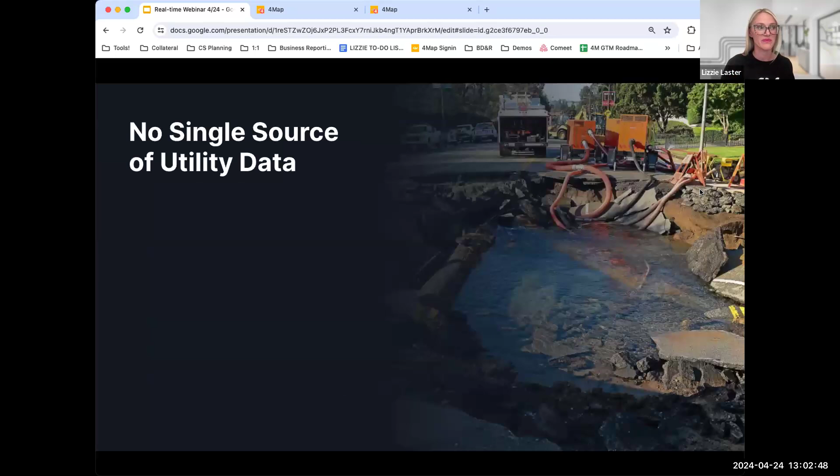When it comes to collecting utility data, the fact that you even joined us today tells me that some of these things I'm about to talk about might resonate with you.

Record research is time consuming. Data is fragmented and there is no single source of truth. Owners respond slowly at different times, if at all, and records can be inaccurate, outdated, incomplete, or non-existent. Poor data leads to poor planning, poor design, and budgeting issues. Due to lack of data availability, there is poor and inefficient planning and design, resulting in extra field investigations due to incomplete data and undefined plans. There's also a lack of certainty in contingency budgeting.

This uncertainty puts your project's execution at risk. Unexpected utility findings lead to project delays and cost overruns. Utility relocations are costly and lead to redesigns and more cost. These are safety hazards due to unknown utility lines and landscapes. I think if what I've said here makes sense to you, that's why you're here today.

So then who are we? 4M is set out to unlock the world below us, ensuring the continuity and development of all critical infrastructure and services that people rely on, through extracting and conflating data from the public domain and documents such as as-builts and blueprints, as well as leveraging satellite imagery for identifying on-surface objects and change detection to validate the data.

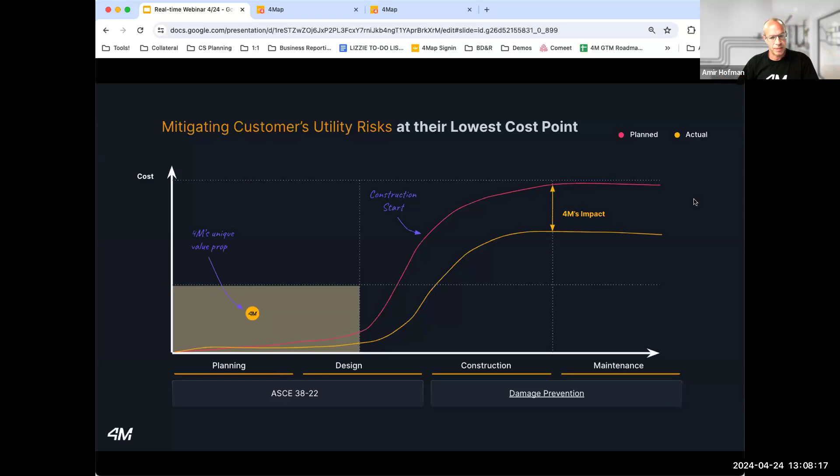So when we're focusing on the real-time data, first of all, what do we mean when we say real-time? We mean that it's preliminary, foundational data that is available to you instantly, in just a matter of a click. You create your project in our product, click a button, and immediately, in a matter of seconds, you get the utility information you need to proactively identify risk and conflict resolution before the field investigation begins.

Regardless of whether you are an organization that follows SUE practices fully, partially, or not at all, having this comprehensive utility information at the beginning of the project will give you a clear picture about the utility infrastructure within your project area and help you minimize the unknowns and plan your project correctly. So these are the benefits and the value that we provide with the real-time data.

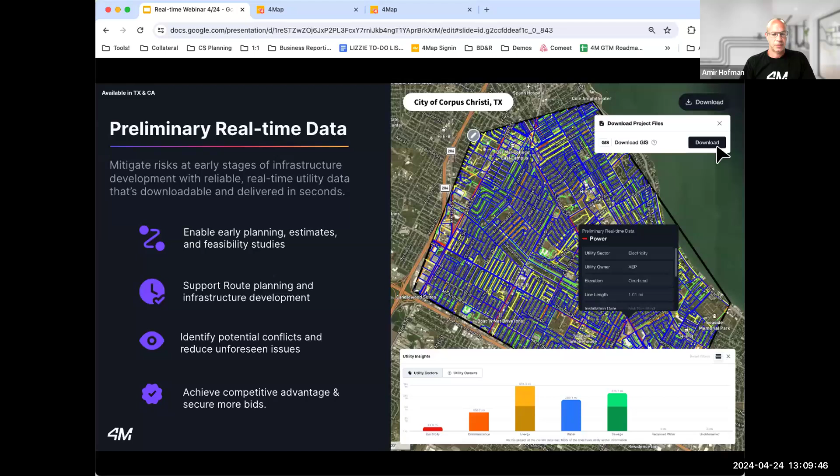This is an interesting part. Usually in the initial phases of the project, all of you are submitting tickets to the one call center, design tickets, to begin the process of identifying underground utilities within the project site. You're getting utility owner responses, identifying utility owners, etc.

You're usually doing it to get the data, even though we all know the data there isn't sufficient, but also from a liability perspective, to start communication and collaboration with the utility owner. The process of submitting a design ticket and getting information back from the utility owners usually takes days to weeks for responses, and sometimes responses may not be received at all from some utility owners.

Now imagine that you just click a button and get instant access to utility owner information, enabling your immediate planning and coordination with the utility owners while you're waiting for responses from the one call center. You're not replacing the process with the one call center; you're just getting the responses and utility owner information in a matter of seconds, so you can start your planning immediately without waiting for these responses. This data-driven approach accelerates project preparation and minimizes dependencies on traditional response times.

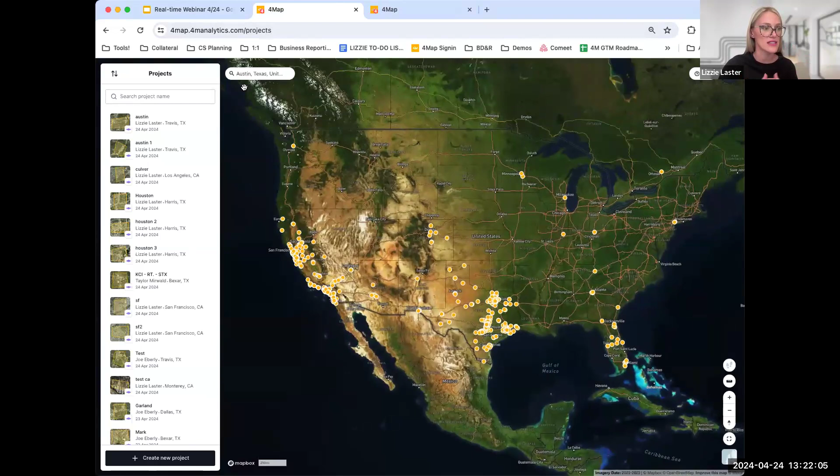What I'm going to do here is zoom in just a little bit, where I can then create my new project. I'm going to draw a polygon just in this area, grab a big swath of area, close out my polygon, and hit next. I'll just call this Austin, and then hit 'see utility map.' It's kind of straightforward as that.

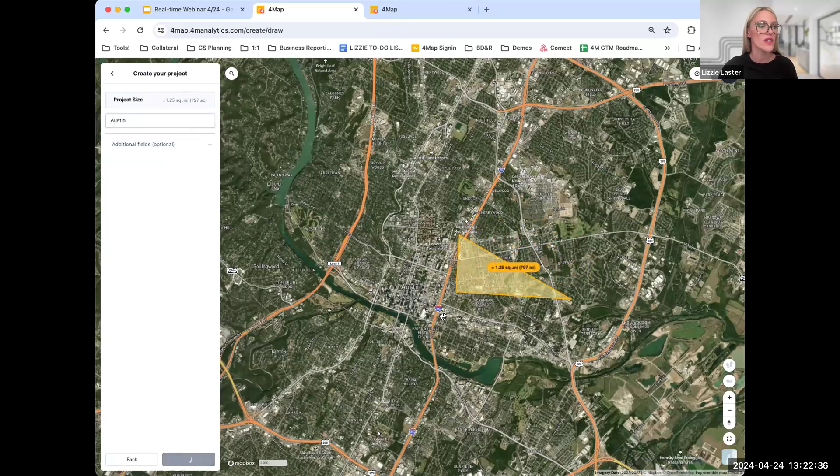The first layer you're going to see is what's called our utility density map, and this is the data behind the real-time layer. This is free to anyone who logs into the platform today and wants to take a peek at some of their projects, where we give you high-level analytics such as the total utility owners and utility line length.

But for the sake of this, I'd like to also take you to the real-time preliminary data layer. So this is going to start loading in, and you'll see in a matter of seconds the real-time utility layer. What we're doing here is providing you real-time access based off of the public realm and GIS databases and servers, giving you visibility in seconds into what you guys would go about collecting for your records.

When we think about this layer, think about marketing, business development and pursuits, initial record research, feasibility and concept planning studies. That's really where we envision this layer chiming into your workflow today, allowing you to go after more projects and perhaps even win more bids.

I want to navigate around the platform a little bit and show you what you can see inside of this layer. So as I mentioned, in a matter of seconds we're giving you access into the amount of utility owners at this level, as well as the utility line length. I'm going to take one second to jump into the utility owners and show you how we slice and dice the data.

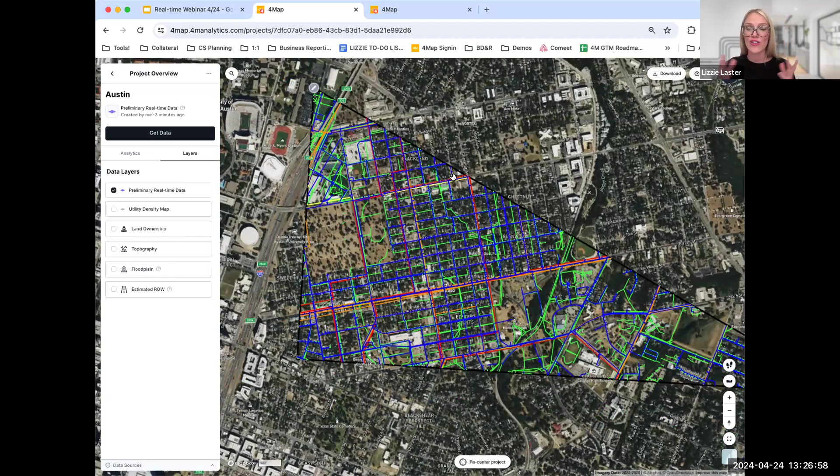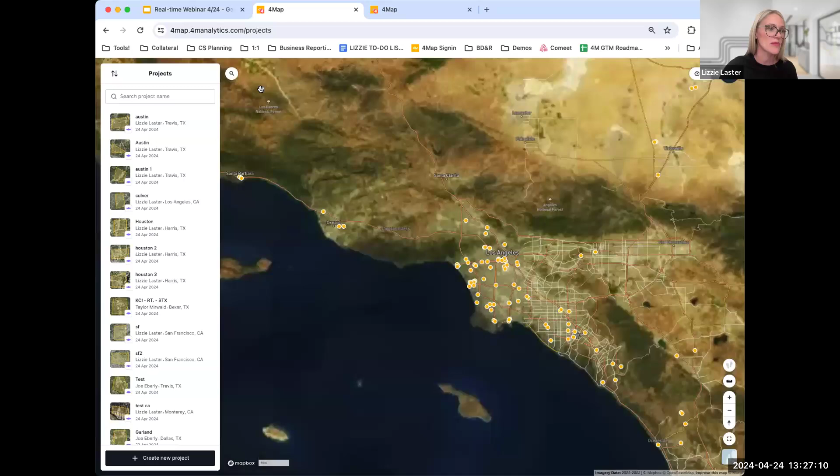The next thing I want to do is jump over and show you a similar project in the California area, as we are launching California, or just launched California. I want to give you a sneak peek at what that could look like for you. So I'm going to head on over to Culver City, and from here, I'm going to zoom in to sunny California.

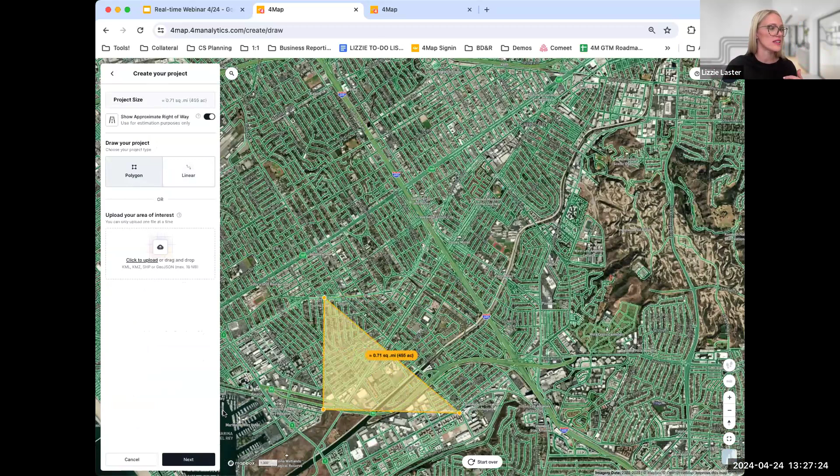So what I'm going to do is the same steps, create those projects. I'm going to draw my polygon and close it out, and then I will hit next, and see my utility map.

So similar concept here, right? Immediately we are going to see that heat map to where everyone has access to this as well in California, where you are able to leverage this at no cost, maybe use it in a marketing or a pursuit bid. However, taking it one step further for yourself, you can access the preliminary real-time data, and it's going to load in all of those segments. We'll start to see them all load in one by one, fetching the sewer, fetching the reclaimed water, fetching the electricity, and it's going to all start to load in here.

And then same thing, I can come and slice through my list, viewing my list. If I want to see specific lines belonging to a specific utility owner, I can simply show those lines and click into it, and you'll be able to see again the sector, the utility owner, and the line length, and any additional data that we might have available at this layer.

Okay, so that is going to be the real-time layer. And so at the highest level, that's the real-time subscription. I'll walk back through what Amir mentioned: the real-time layer, we are aggregating all of the public realm into one real-time map, conflating and synthesizing that data into one map for you. And then I'll let him get to the roadmap for you guys. I almost jumped into the roadmap. So that is the real-time layer.

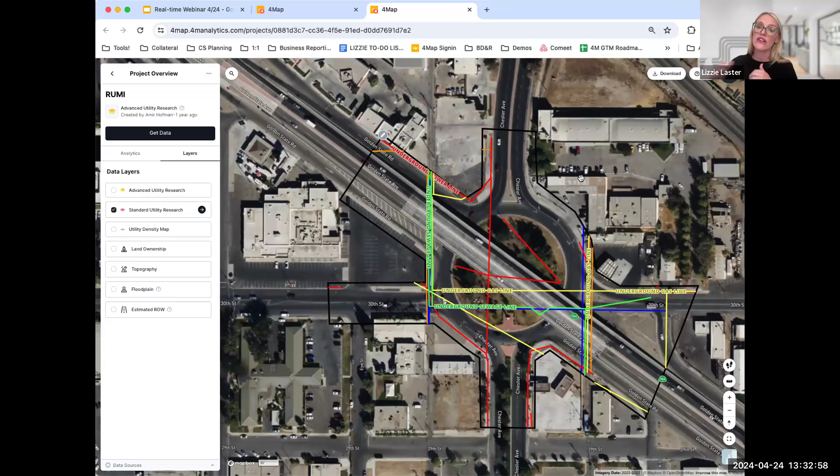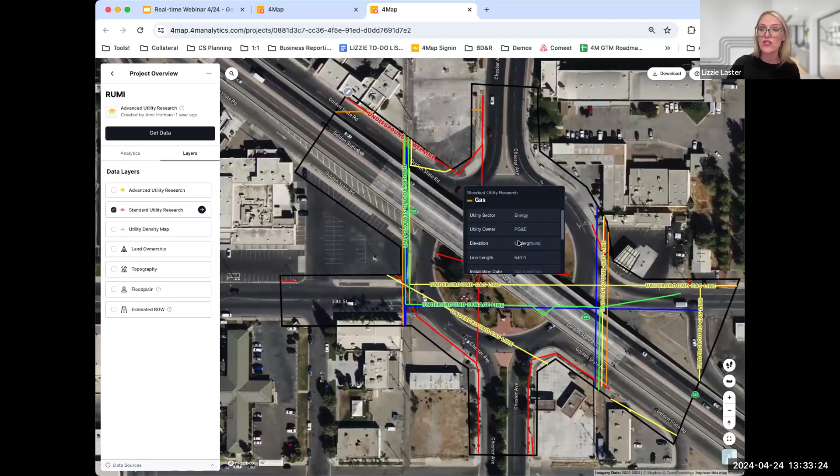At the standard level, you start to see we leverage on-surface objects to also pull in and correct minor deviations. So what you can see here, at the level of what's findable through construction plans, as-built records, and current imagery, we're able to pull in this project. You can come in here and click, just like we showed with the utility sector, and the utility owner, whether above ground or underground, is highlighted for you here.

The standard we recommend as a best practice for preliminary planning, record research, conflict analysis, and utility coordination on the front end of the project. So the standard is a really common one to see even earlier in the project lifecycle.

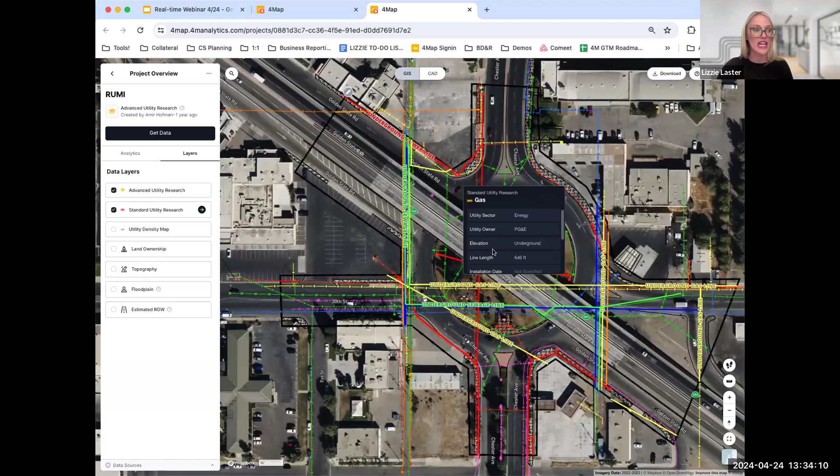What I want to do from here is leave the standard map up, and I want to pull in the advanced utility research. This is our highest confidence level data. So I'm going to pull this in, and you see it gets a little busier almost instantly, right? We've seen some of those questions come through already talking about this. So I'm going to zoom into this section here.

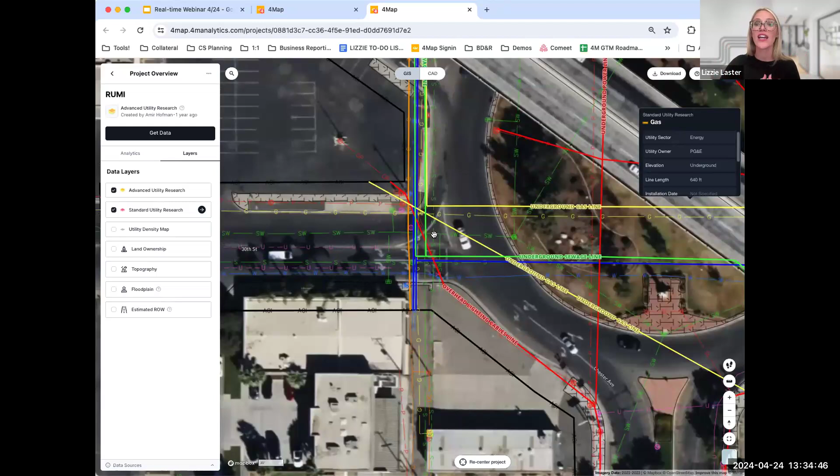What I want to talk about is how we go about advanced, and why is there more data? The advanced data takes everything we talked about - conflated, synthesized, and digitized to create the map for standard - all those records and public realm data, all those blueprints and as-built, all that visual imagery. Then I apply historical imagery over time, and we look for any trenches, earth scarring, and at this point correct any deviations and lines we're able to identify through visual evidence, as well as find undocumented lines.

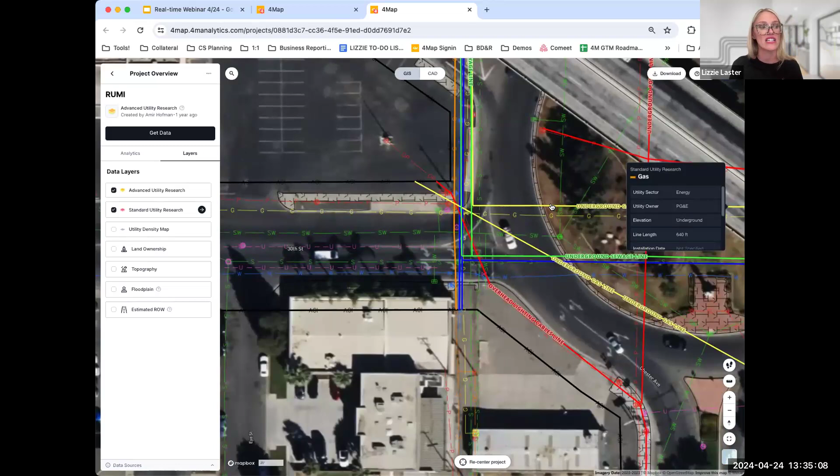So what we've done is increase a higher confidence by finding undocumented lines, correcting deviations, using our full technology stack, applying historical imagery, and providing you with a more robust map to take into the field. So at this level, think about advanced - when I talk about the advanced level, I want you to think about going into design and pre-field investigations.

We've seen people use it for post-field investigations, for QA, QC, as well as risk mitigation, getting closer to the design phase and needing more confidence in what you're doing. We've gone over the heat map, the density map, and our real-time layer, both standard and advanced. From here, I want to reserve time to give this back to my friend Amir to go over the upcoming roadmap.

I think it's important to mention that the data is available to download, to export into different formats, GIS format, CAD format, just a matter of a click. So you can take the data and import it into your own system as needed.

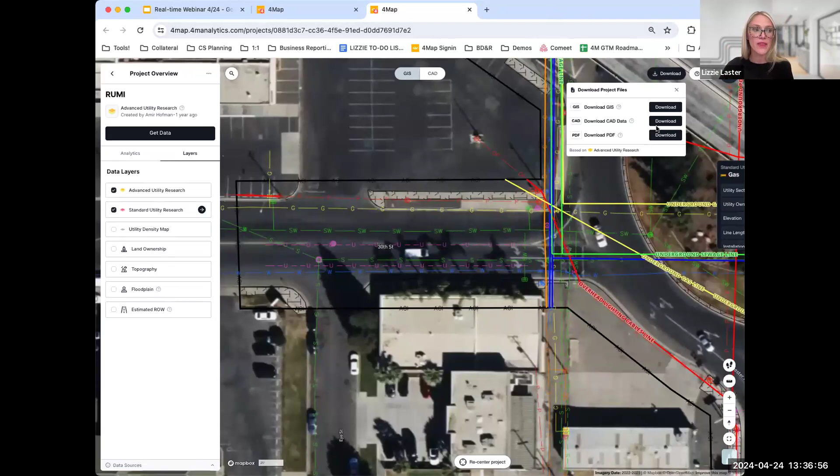Yeah, let me take one second. I'm so sorry, Amir, you caught me on something I forgot to mention. You can download this data directly in the platform. Just to give you a sneak peek, you can jump over to the CAD file. For all my engineer friends, you can see that we present this here, we do provide you with the CAD files. And I'd also like to show you the PDF that we provide as well. I'll give that back to you as soon as I take a peek at this for our friends.

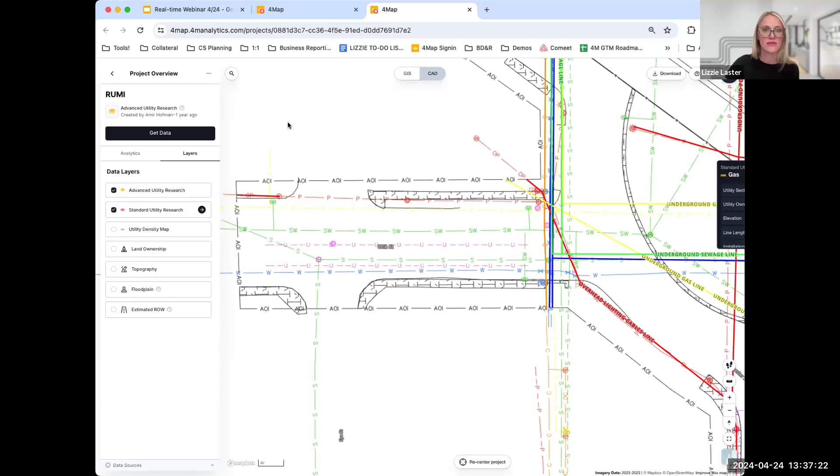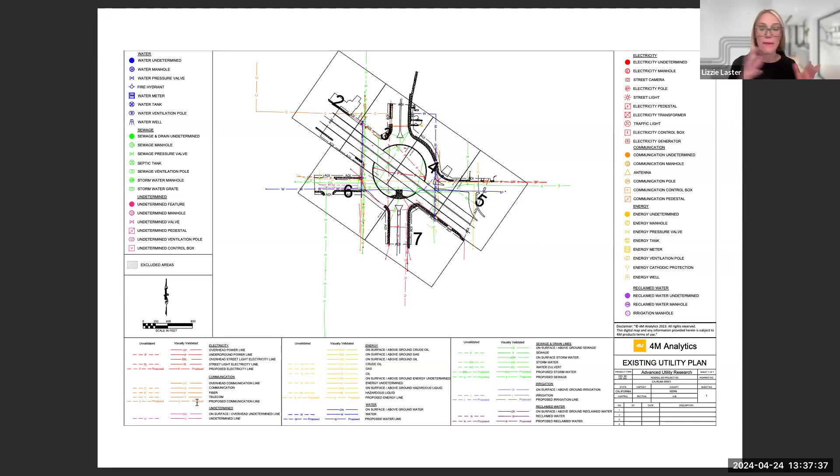What you can see on this PDF is that we're giving you visibility into our line type, our symbology, as well as what you can view and where the lines fall. We'll give you all of your CAD files. You have your symbology, as well as whether we validated it or not, and what type of line it is. You'll be able to use this along with your advanced data records as well. This comes with every advanced file.

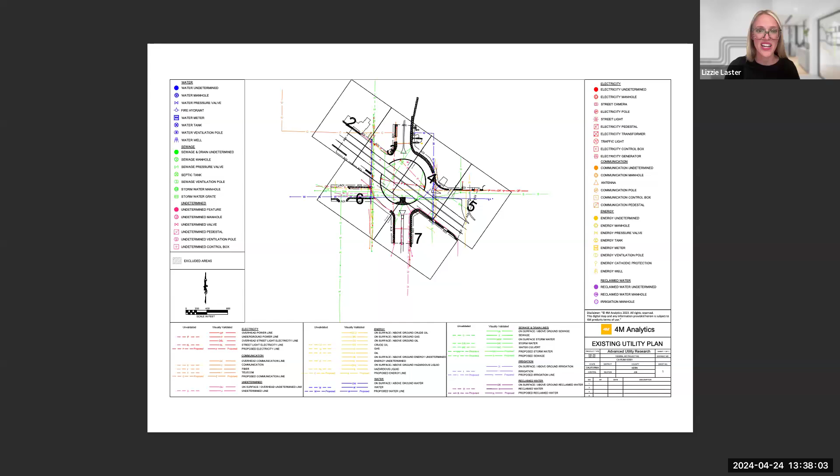Apologies, and thank you, Amir, for holding me accountable for covering all of that information. Let me share back over to the presentation.

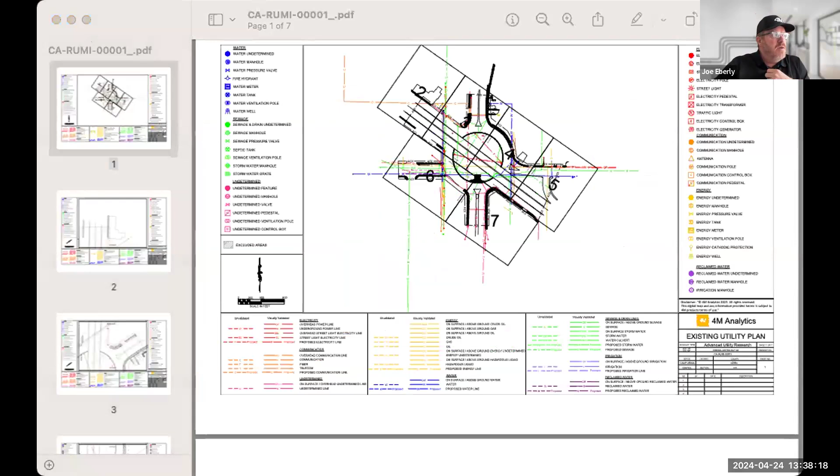Lizzie, while you're switching back to the slide deck, Amir, we got a couple of quick questions before we turn it back over to you. Can the utilities for smaller rural areas, not as populated as Austin or California, be shown in 4M?

The short answer is yes. The technology can be applied to any area. Think of any area in the United States, whether it's rural, urban, or a combination of both. The technology can be applied and we can deliver the results in the same way in an urban area as we can in a rural area.

One other quick question: can we add a layer where we can see land ownership or highlight public right-of-ways throughout the country? The answer is yes. As the states are launched and become available in the platform, all of the different layers that Lizzie walked through would be made available for you in any of those launched states.

Back to you, Amir. Yeah, being respectful of the time we have, I'll try to go in a nutshell over the roadmap. We're focusing on the features related to the real-time data, not our entire roadmap. This feature will ensure that you have the latest information just a matter of a click.

We launched real-time data in Texas and California in the recent two months, and it's already accessible in these states. In May, we are going to launch Colorado and Florida as two additional states with accessibility to the real-time data. End of June, end of this quarter, we'll do the same with Georgia and New York for further extending our reach of real-time data across key states.

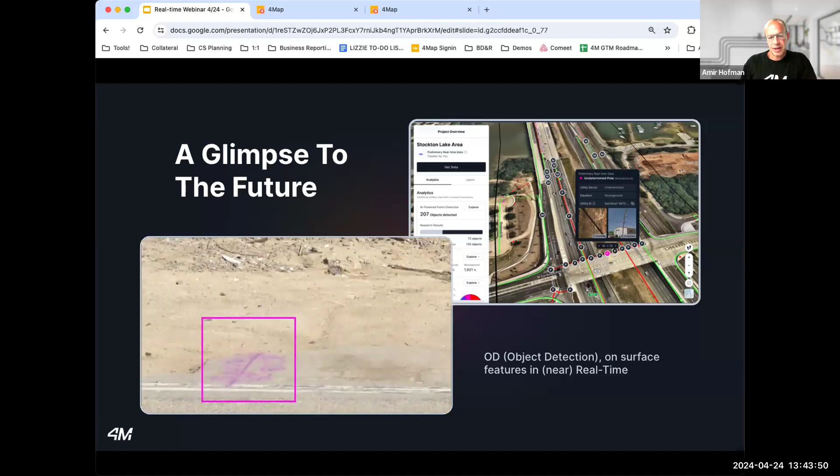For every on-surface object that we identify, we will attach visual evidence to enable you to trust the data and to pinpoint exactly this on-surface object. We will start with manholes and poles, and gradually add more and more on-surface objects into that process directly in the real-time data.

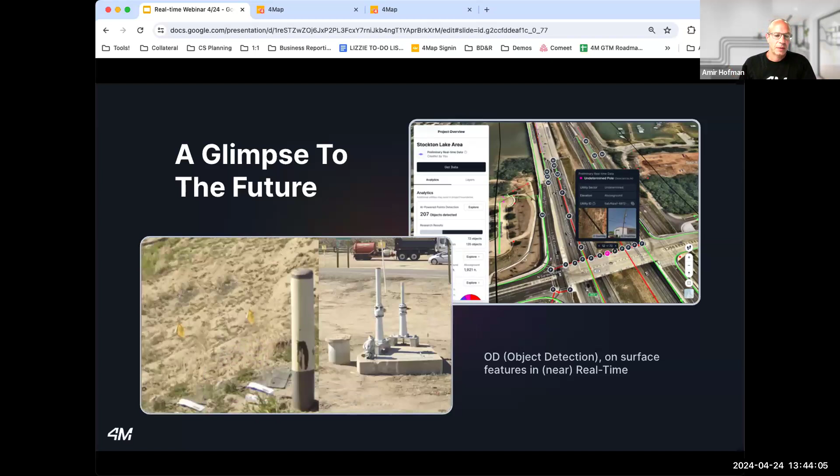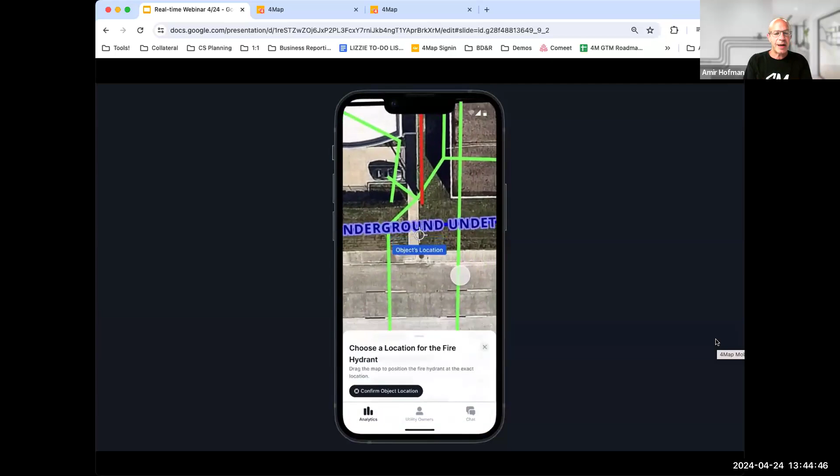I think the last one we would like to share with you is that we're working on a mobile application designed to enhance collaboration between the engineers behind the desk and the field team. We want to empower seamless data upload, maintenance, and workflow management on one shared single app. The mobile application intends to bridge the gap between engineers and the field team, and to facilitate real-time collaboration.

On project data and tasks, field users with this app can contribute meaningfully to project management, capturing data directly into the app, capturing what they see on the field. This reduces reliance on manual data entry and paper-based processes, and also reduces the data fidelity loss that happens between different stages of the project.

We're currently working on the app, and as a very customer-centric company, we value user feedback. We're doing discovery sessions over the next 2 months with different teams from our customer base and generally from the market, to make sure we're evolving this collaboration tool, addressing exactly the needs, and embracing productivity.

Hey Amir, we had a question come in that maybe I'll throw over to you. Can the data be shared with others once it's been downloaded from the 4M application?